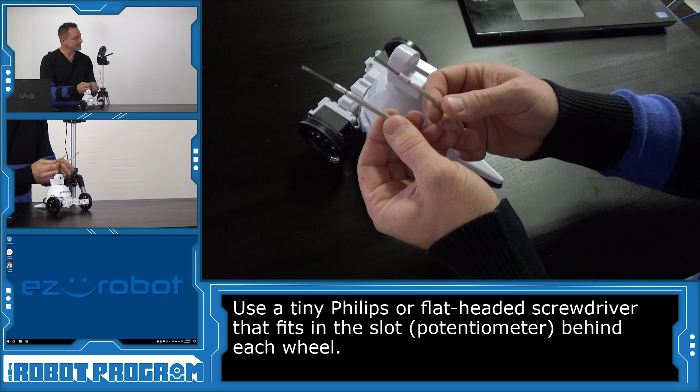In today's episode, I'm going to show you how to calibrate the continuous rotation servos of your AdventureBot. Now, the continuous rotation servos of the AdventureBot, when they're uncalibrated, means that the wheels will spin at different speeds. So to do the calibration, you're going to require a screwdriver of either a Phillips or a flathead. Now, of course, look in the camera here, you will see that they're very tiny. Okay, in this case, I'm using jeweler screwdrivers.

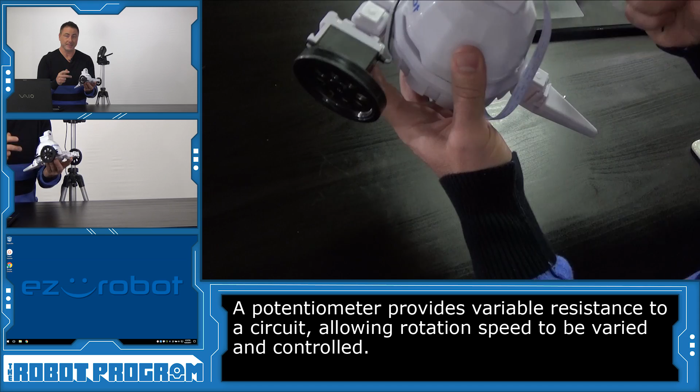What we're going to do is we're going to be inserting the screwdriver into this little slot, as you can see right here in the servo, and we're going to rotate that pot, that potentiometer. We can adjust it for a center point, which is the stopped position. Now, we can do so using our computer, using EZ-Builder, or we can also do it on our mobile device. In this demo, I'm going to show you how to do it on the computer. Then at the end, I will briefly show you how you can access the same calibration screens from your mobile device.

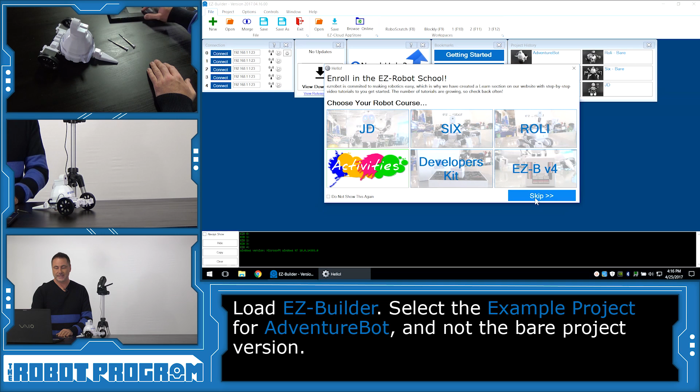So to begin, we're going to load up EZ-Builder, skip the enrollment school, and select Example Projects, and choose the AdventureBot project. Don't choose the AdventureBot bare project. Choose the real full-blown AdventureBot project. And we'll click Not Now for the assembly instructions. And let's turn our freshly charged AdventureBot on.

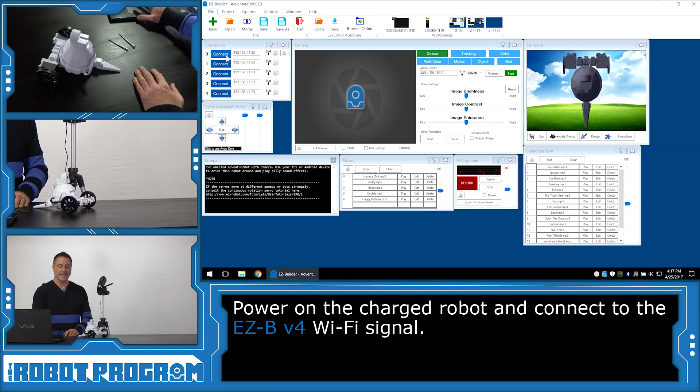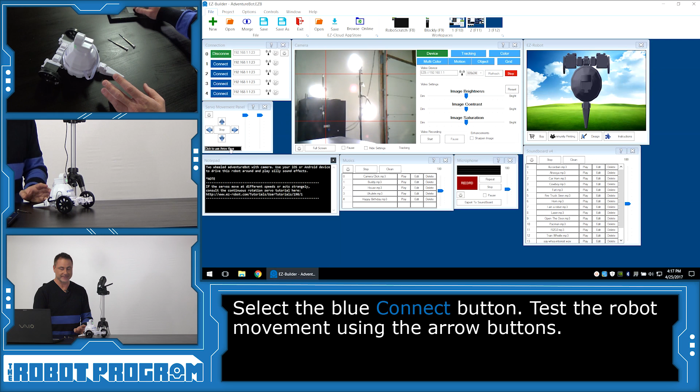Connect to the Wi-Fi network of the AdventureBot. And now we'll push the connect button on the connection control. The camera will load up. Say hi to Andreas. And of course, we can test out the AdventureBot by clicking inside of the little blank space here and using the arrow keys to drive the robot. Now, of course, he's on full speed mode right now because these slide dials are adjusted for full speed.

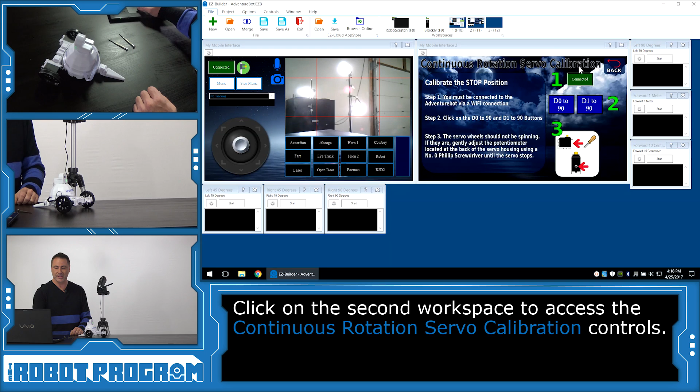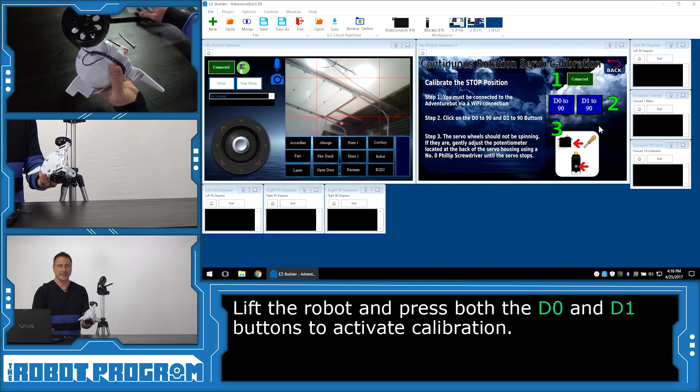So to test out his calibration, we can push on the second workspace up here. You'll be presented with a bunch of windows. Now look at the continuous rotation servo calibration window here and lift your robot up, because when you push these buttons, the wheels may spin on their own. And I'm going to push this button and this button to activate the calibration on both servo wheels.

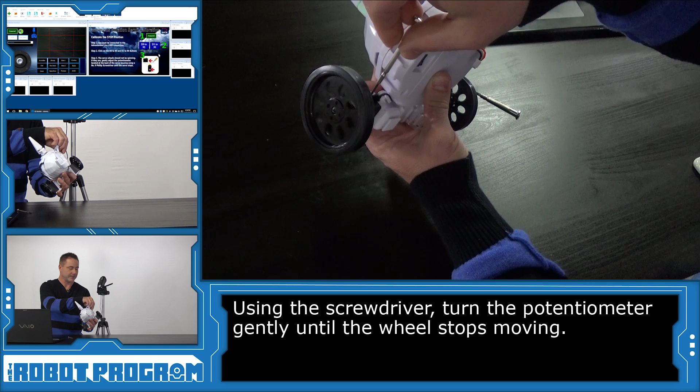Now I'm going to use a screwdriver here and I'm going to turn the potentiometer gently in each direction. And you see how the wheel is spinning? So what we're going to want to do is we want to turn the calibration so the wheel stops. Okay? And there's no noise coming off, just like that. We'll do the same with the other one.

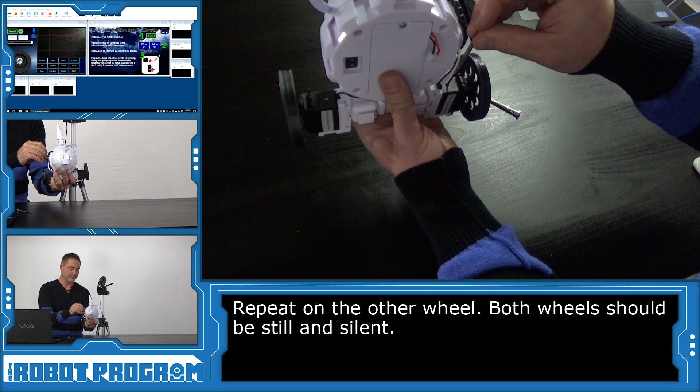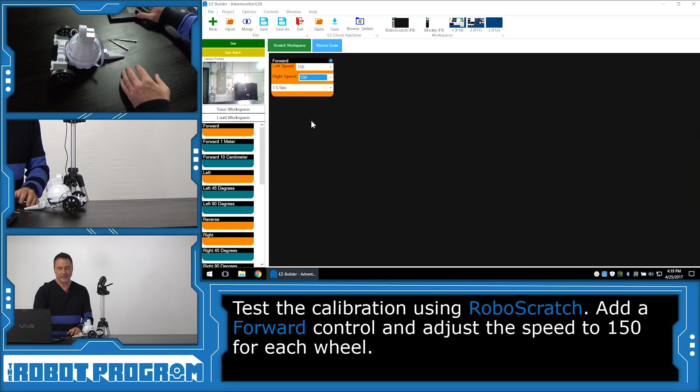There we go. We can test this by going into our RoboScratch interface, and we will add a forward direction, and we'll have the forward go for 1.5 seconds. And let's adjust the speed to something like maybe 150, and the right wheel speed also to 150. Make sure there's enough room for your robot and push start and he will drive.

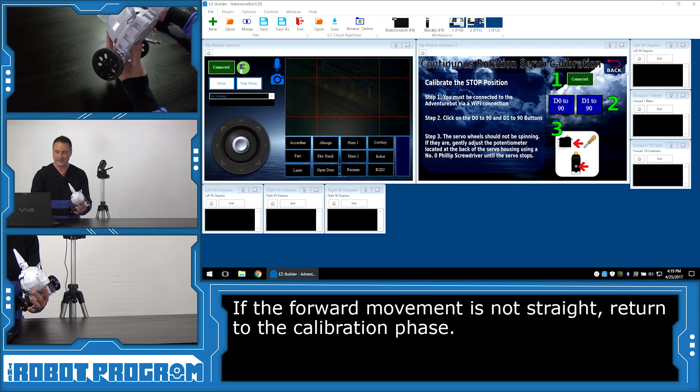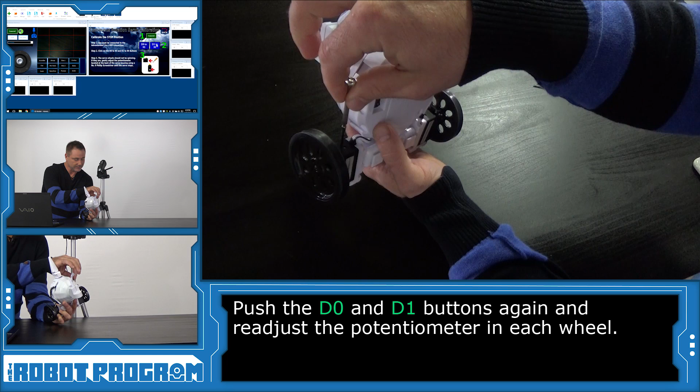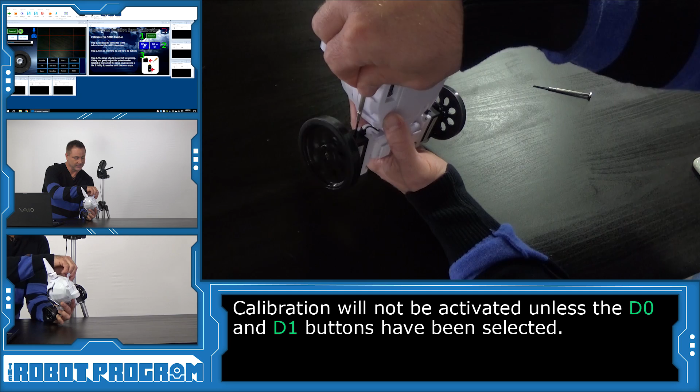Now, if he turned like you saw him do in this video, you can go back to your calibration phase again, push the two buttons, and again, just turn it till it stops. And do the same with the other. Turn it till it stops. Oh. If you don't push the button, it won't start moving. So there we go. As you can see, I didn't hit the button for that one. We'll try it again. Turn it till it stops.

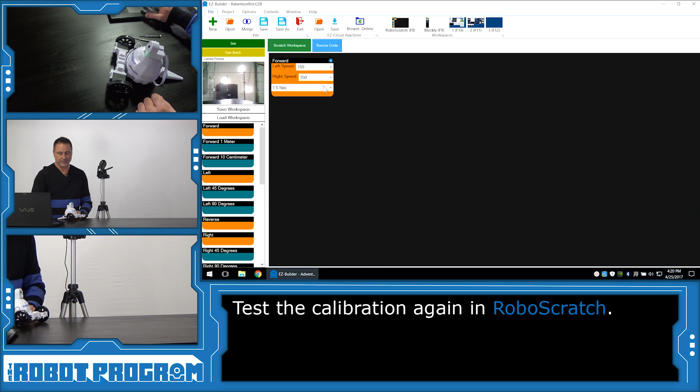There. And now we can go back into our RoboScratch here. And again, this time we'll make it run for just 1 second, so it just doesn't run off my table, and I'll push start again. There, as you saw that time, it is running perfectly straight. So it may take a few calibrations to get it perfect, but once you do, you won't have to change it again.

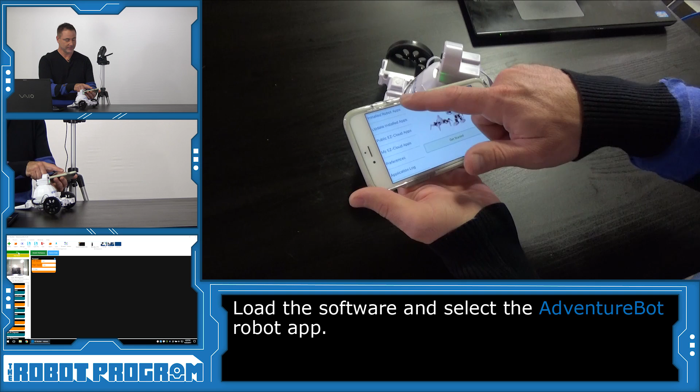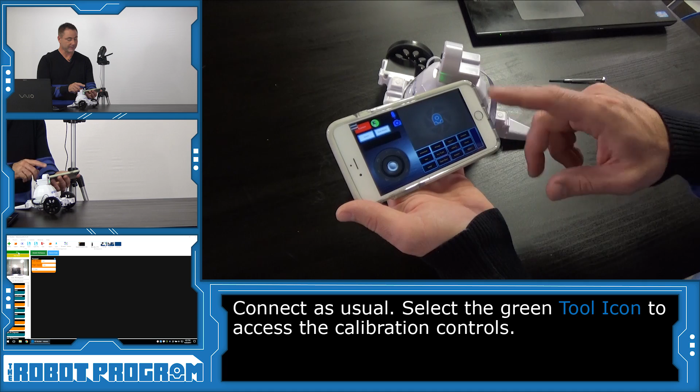And as promised, I'm going to show you how to do the exact same thing using your mobile interface. So load your EZ-Builder software on your mobile interface, installed apps, choose your AdventureBot, and select Open. And you'll want to connect to your robot using this interface that you normally do. However, to calibrate, there's a little picture of a calibration tool right there. If you push it, it brings you to the calibration screen where you have access to press the buttons to turn Calibrate on or off. We can push the back button.

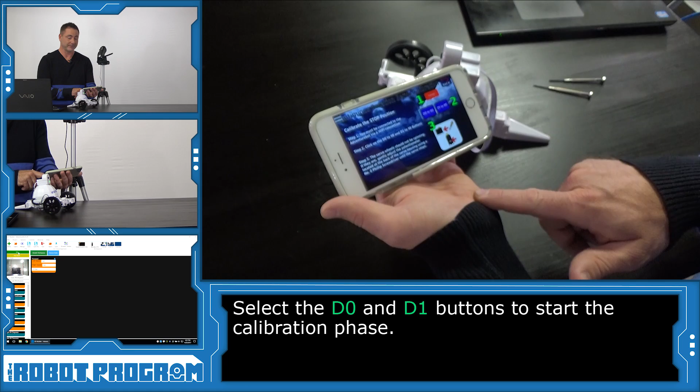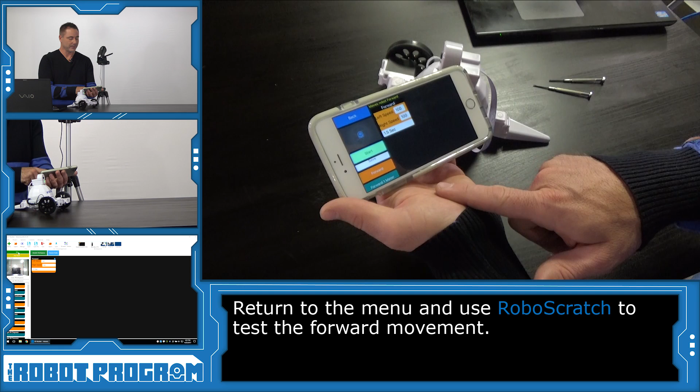And of course, to access RoboScratch, choose the hamburger icon on the top left, select RoboScratch, and now you can also add your forward and follow along with this video using the mobile interface.

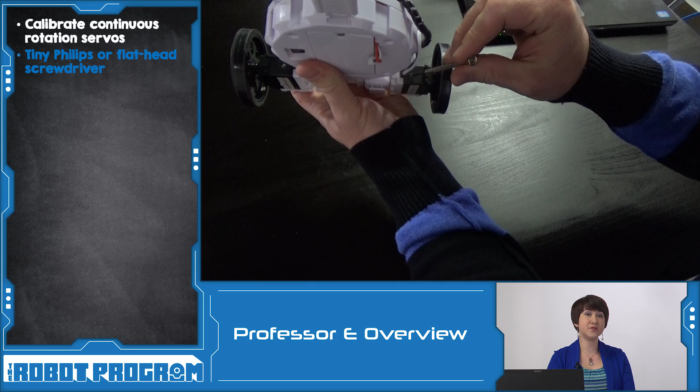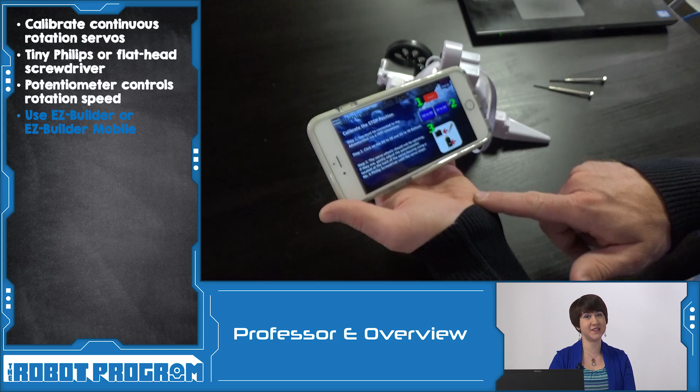In this episode, we showed you how to calibrate the continuous rotation servos for your Revolution AdventureBot. You'll need to use a tiny Phillips or flathead screwdriver that fits into the slot at the back of the wheel servos. You're going to use this to rotate the potentiometer. A potentiometer provides variable resistance to a circuit, which in this case allows us to change the rotation speed. You can use the desktop or mobile versions of EZ-Builder to calibrate your AdventureBot.

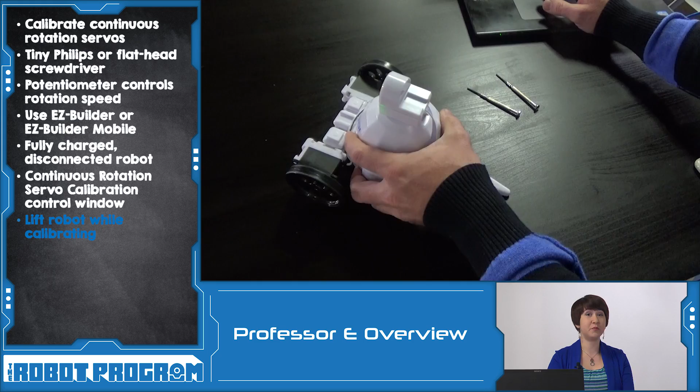As always, make sure you're connecting to a fully charged robot. Within the continuous rotation calibration window, make sure you pick up your AdventureBot first and then select the calibration buttons. For each wheel, gently turn the potentiometer until the wheels stop moving and there is no more sound. Test your calibration by having AdventureBot drive forward at a low speed. If he's not turning sideways and he's moving straight, you know you've been successful.

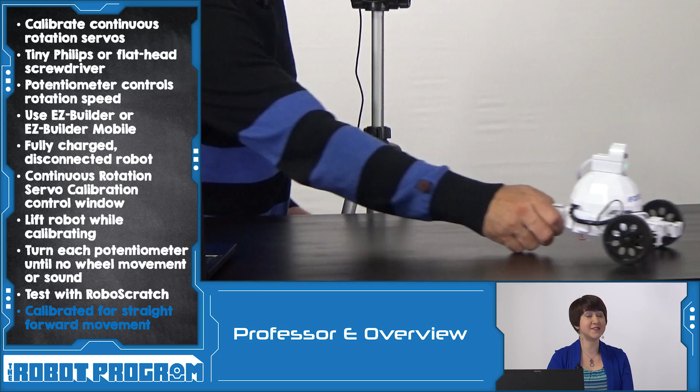True or false? Both the desktop and mobile platforms can be used for calibration. What is a potentiometer? What will indicate correct calibration of AdventureBot?